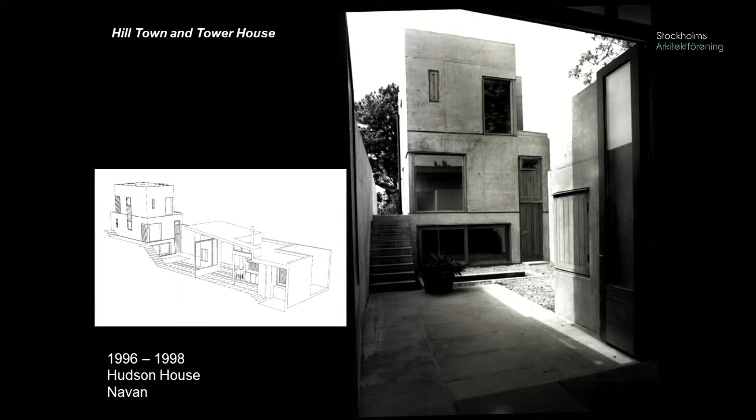The small house we built in Navan is a tower house and a hill town, two buildings arranged across a court. It cuts into the ground and rises above it. The Howth House and the Ranelagh School, designed at the same time, are concerned with building the site, cutting and filling to navigate level changes and to connect the building to its ground.

The school site is small, so new ground is made on the roof, where a light timber and steel structure provides covered outdoor space for learning and play. And at ground level, the veranda and corridor...

Here, the slides aren't moving again. Yep, thanks, that's fine.

At ground level, the veranda and the corridor act as a single space between inside and outside, where the building and the site become one, a contingent space where people can pause before committing to enter.

So the next phase I'll talk about is talking to trees and air. In Cork, at University College Cork, we've built three projects, but the one I want to talk about is their University Art Gallery, located in a remarkable piece of ground here. This is before the building was built. The beautiful river runs through the site, and there are mature trees.

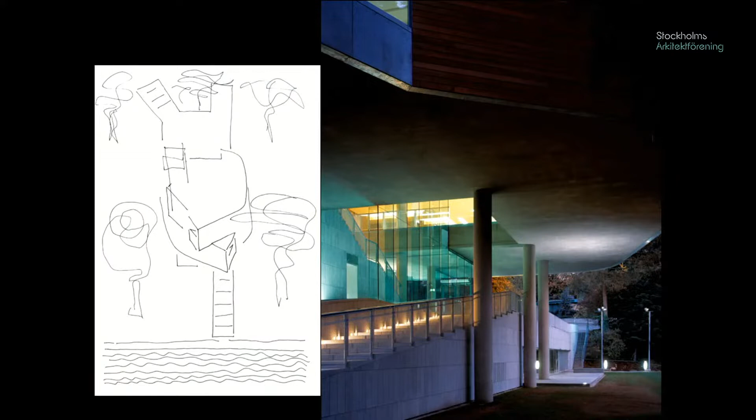So our project raises the gallery and the usable spaces above ground with big cantilevers so that the structure of the building doesn't interfere with the roots of the trees, and allows the trees to continue to exist really close to the building.

Because of the level change on the site, you walk across from the avenue over the cafe and the storage areas down through the site. So in a way, the building is divided into two parts, one in the air and one on the ground.

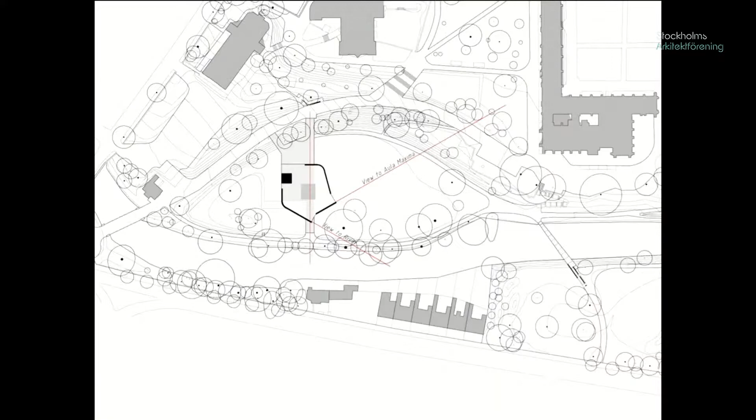Within that, the building kind of twists and turns to take in particular views of the campus. We're very interested in this idea about balance and contrapposto, as you find in sculptures, for example, of Bernini — the idea that the balance of a building might almost be twisted on its base, and that the building is then allowed to face in different directions and have this sense of asymmetrical stability.

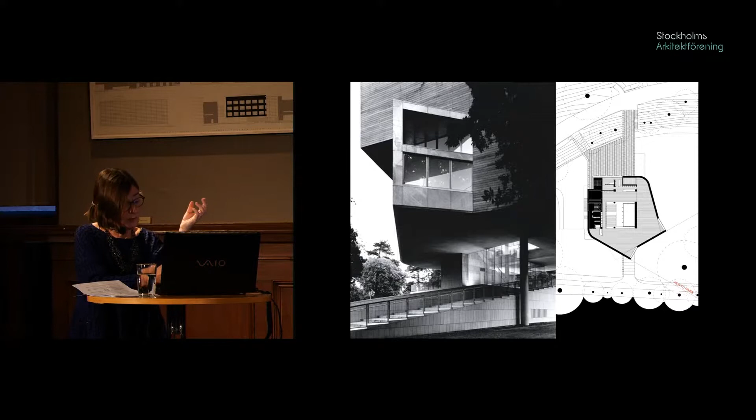In fact, all the exhibition walls are straight walls, but where they turn a corner, the corners are curved. The windows are in a way outside the gallery spaces. You step into a triangular space, and the windows connect you with the trees and the buildings on the campus.

I suppose the other important idea about walking through this section is that you would be walking through this space — the cafe is underneath and the galleries are above.

We've hollowed out a kind of upside-down courtyard so that when you're walking through, as in this photograph, you can see into some of the galleries at first floor, but because you're totally sheltered, there's no daylight, no reflections — you see completely into those galleries.

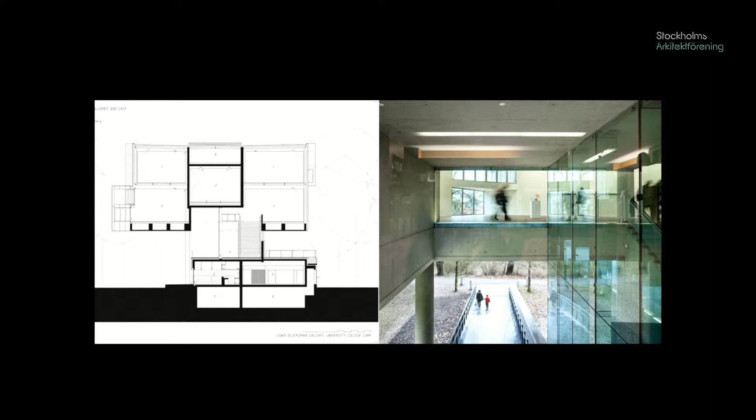This was a way of making it clear to students walking through the campus what was happening in the building — that there are exhibitions, that there are events in this building — so they can choose either to engage or not engage, or they can engage simply by looking in from outside as they walk under the building.

When you're inside, when you step into these window spaces, you're in a space between inside and outside. In a way, you're in the trees and you're in the gallery, but there's a low ceiling in the windows, so you're in a kind of space between.

The view of the building from the ground is that the path runs through as an external route, and then you have the cafe under, and pulled aside and shifted in this contrapposto relationship is the gallery above.

Talking to real and imagined places, we've done a number of installations in Venice at the Biennale, and it's always an interesting and difficult challenge to exhibit architecture, because if you're exhibiting art, painting or sculpture, you exhibit the actual works, but at an architectural exhibition, you're normally exhibiting representations of works.

So this Capriccio by Canaletto of Palladio buildings we found really interesting, where Canaletto collected a series of both built and unbuilt buildings by Palladio and put them together in a kind of new place invented by him, an imaginary place.

And yet it's real, because some of these buildings are really built and because they're fully designed.

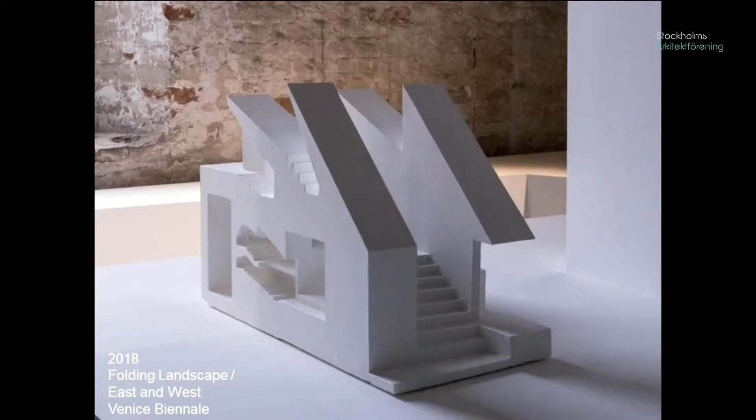Our installation in 2018 in the Free Space, Grafton Biennale, was titled Folding Landscape East and West. We were thinking of it as a little building in its own right, in conversation with the Corderia, but also as a representation of two unbuilt projects we were working on at the time. The first is the Robinson Research Centre in Roundstone on the west coast of Ireland, a really interesting ongoing, or possibly not ongoing, project which I'm trying to make happen.

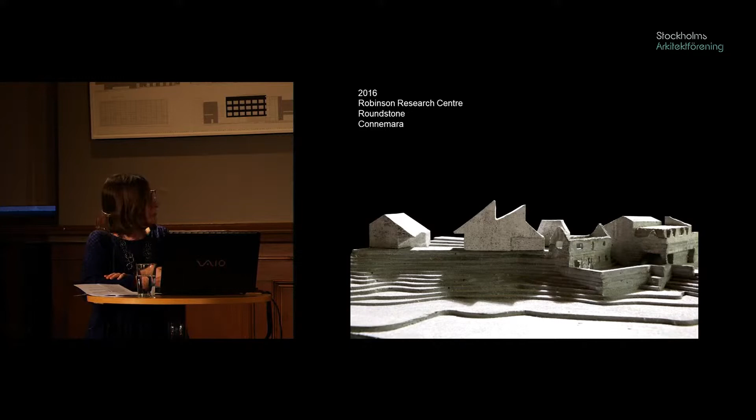There's an existing house on the site, the house of a wonderful man, Tim Robinson, whom I mentioned earlier, who was a cartographer, a writer, an artist, and a mathematician. He lived for more than 30 years in this house at the end of the pier in the village of Roundstone, a very special village in the west of Ireland.

It's always had many painters and artists visiting, so there are lots of artistic representations of it. It's a planned town, laid out by a Scottish engineer in the early 19th century as a single-sided town facing out to the sea, with a straight street of houses. Nimmo, the engineer, also designed the pier — he designed many piers in the west of Ireland.

At the end of that pier is the house of Tim and Mairead Robinson, who both sadly passed away during the COVID lockdown. This is a portrait of Tim in his studio, a wonderful man who came from England to live on the Aran Islands around 1970.

Because there was no map of the Aran Islands, he decided he had to draw one. Then he had to learn the Irish language because he needed to put in Irish place names. He subsequently developed an amazing way of describing and giving back to us our own landscape.

So we all in the west of Ireland understand our place more because of Tim's work. His maps — this is part of one of them, he made three in the end — are very much about place names as well as the shape of places. The place names are a huge part of people's understanding of the history of these places.

Most of the names on the Ordnance Survey maps in the 19th century were translated roughly, and badly, into English. So Tim went back, found what the original Irish names were, and put them all on the maps.

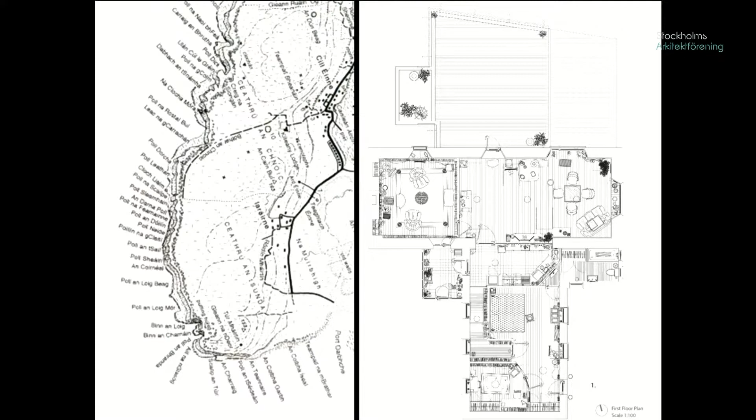When we started looking at his place, we brought students there maybe ten or more years ago. The first task we set them was to make a map, a survey — like a map of Tim and Mairead's house. They drew the house with every piece of furniture, the books on the shelf, the bottle on the table, the bedspread on the bed, as a kind of starting point for mapping the house.

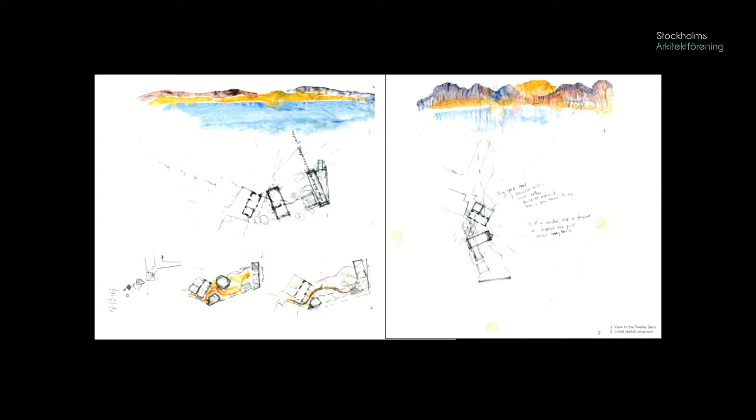These were two wonderful, elderly people living in a kind of genteel poverty in a place that looks out at this wonderful landscape. We were commissioned by the university in Galway, to whom Tim had agreed to bequeath the house, to design a research centre to continue after his death — a research and exhibition place.

I made these drawings on site, just thinking about the relationship between the house and the landscape, the views, and how that might evolve. Then we went on holidays to Greece in the middle of thinking about that.

So I started drawing these amazing stones, the hard obsidian and the tufa rock, thinking about weight and lightness and different types of concrete and construction.

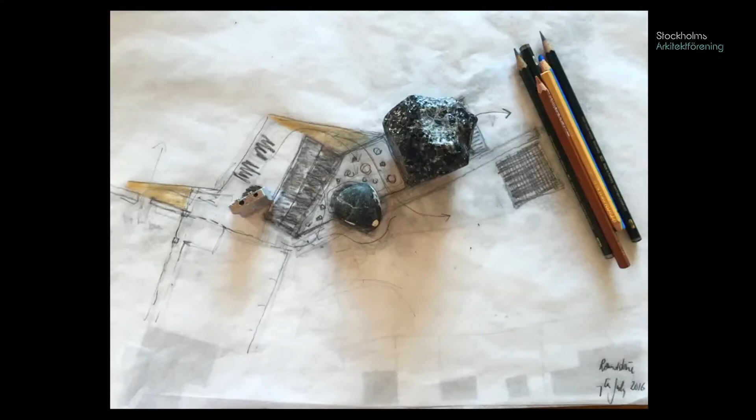Because we were on holiday while thinking about the design, we ended up making a model like a sketch, using one of those stones along with some pencils and a pencil sharpener — the pencil sharpener became the lift shaft, the stone the big room, and the pencils the studios.

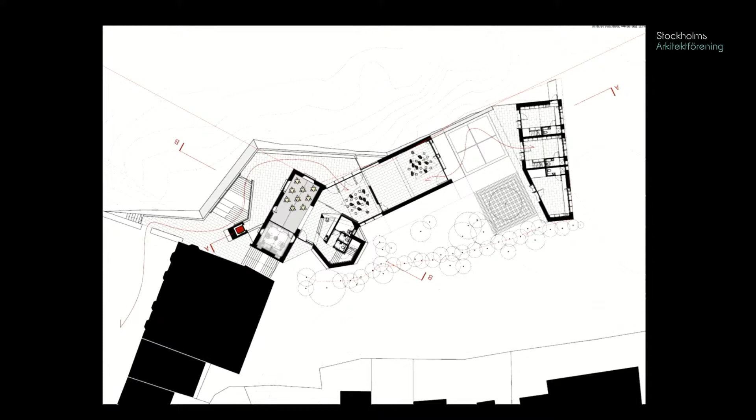Then we came back, and the people in the office drew up this project, which adds to the existing house and makes a wall of research studios along one edge, keeping various elements of the landscape and garden that Tim developed.

There's this sad story that Tim died and then the university turned down the bequest to the house because they didn't want to take on the expense of doing it up and running it. They had already received his archive and absorbed that into the university. So our project was to make these big rooms with big roofs that bring light in for exhibition, for meeting, for projects, made in a kind of concrete mix using local seashells and sand.

When we were invited to Free Space, we made this installation. It's like a little building, really. This is a 1:2 model of that big room we were making in Connemara. So we built the project at 1:2 here, but we also made it like a landscape, a place you could step onto with seats and benches, because we're obsessed with seats and benches.

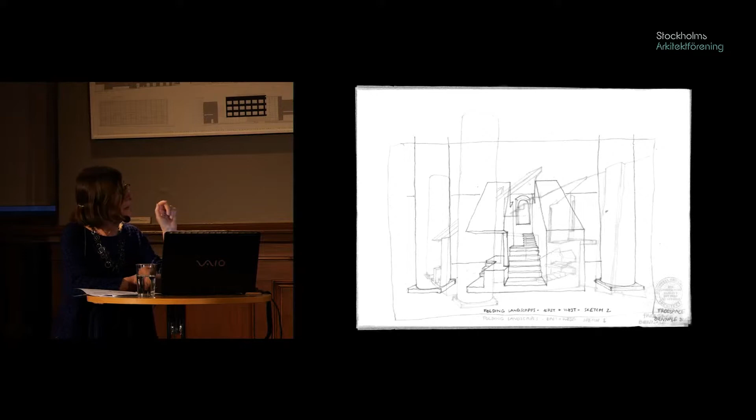This is also about having a conversation with the amazing brick columns in the Corderie, and particularly with the window. So the main intention of this project is to make a stairs that you could walk up so you could look out the window in the Corderie and see the canal below. We selected a bay where there's a canal outside, and the building is an installation to let you look out a window and look at some brick columns, but it's also a representation of a project, and it's also like a Greek chapel in the landscape.

It's a whitewashed structure which has its own kind of presence, and we worked on this also another year in Greece. So while sketching these chapels, I was also sketching ideas for this installation, which is about itself as well as being about these two projects.

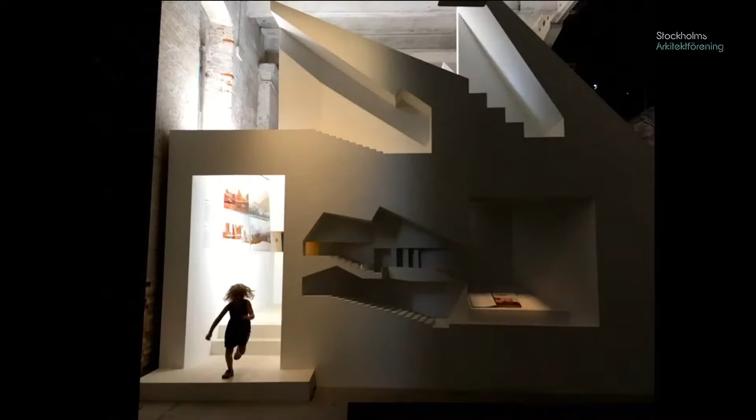The second project is an opera house in Shanghai at 1:10, which we lost the competition, and I'm not going to say any more about it.

But the installation has little spaces underneath. It's like an Irish shrine where you can walk behind and look at drawings, and there's precious places with gold leaf. And then there's a sense all the time of people moving through between the brick columns and up and down this whitewashed structure in this place.

I mentioned in the introduction that sometimes we're talking to, or conversing with, representations of place. And I really am quite obsessed with maps. I suppose, obviously, the Nolli maps of Rome are among the most wonderful maps ever made. So we tend to go every year to Rome in January for 5 days.

I always take a set of photocopies of bits of the Nolli map, the bits I know I'll be in. And every day I draw a line in a different colour pencil of all the routes I take that day. Over 5 days, the map—because it's usually 5 days, and luckily there's only about 5 colours you can tolerate seeing on a map—you build up a kind of intensity around where we stay near the Pantheon, completely woven with lines that move backwards and forwards and cross over each other.

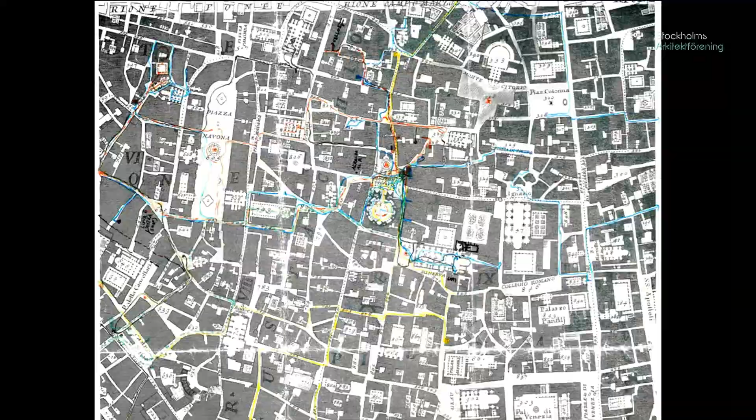And then occasionally you just find little places that you only visit once, which are special. What I find is this really interesting dialogue between observing and understanding, looking at the map and looking at reality. Sometimes I come home in the evening, draw all the lines, and then I see somewhere on the map and think, how come I've never been in that corner? So the next day I go back to it.

Or I'm walking through the city and I suddenly see, in this case, a set of really interesting angles, and I look on the map and find that they're there. But the angles on the map are so subtle you'd hardly read them, whereas in reality they're actually quite strong. So I found this a really interesting way of understanding place, to see how it's drawn and then to walk through the drawing at the same time. In a sense, you come to own the place by inhabiting the map.

At the last minute, just before you come through to the Frari, you walk through a gap that is about 900 millimeters wide, less than a meter. This is a major pedestrian route to the city, and you see the light beyond of the Frari, the light of a public space.

It's such an interesting thing to realize that in cities, this compression and release is so important. If you were designing that now, the traffic engineer would say it's got to be 5 meters wide, and you'd say no, it doesn't—it can be 0.9 meters wide.

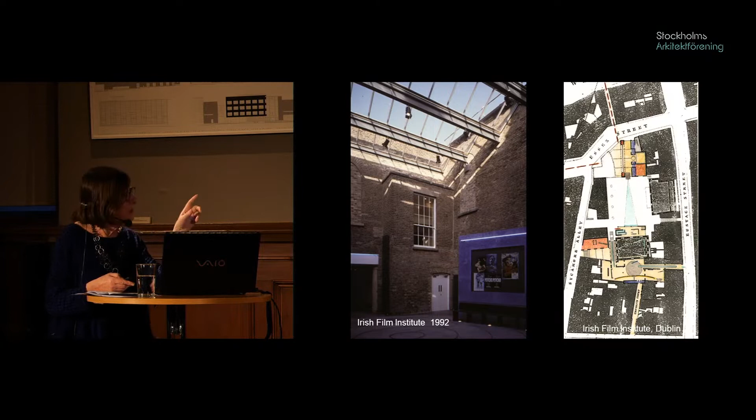This is an early project we did for the Irish Film Institute, a set of existing buildings. We have a beautiful map of Dublin from the 19th century which we kind of scratched and carved our project into. It's a project weaving between old and new, using an existing corridor that comes through into a tall space. The sense of the spaces we're trying to make here is something we have learned, and continue to learn, particularly from the spaces in the city of Venice.

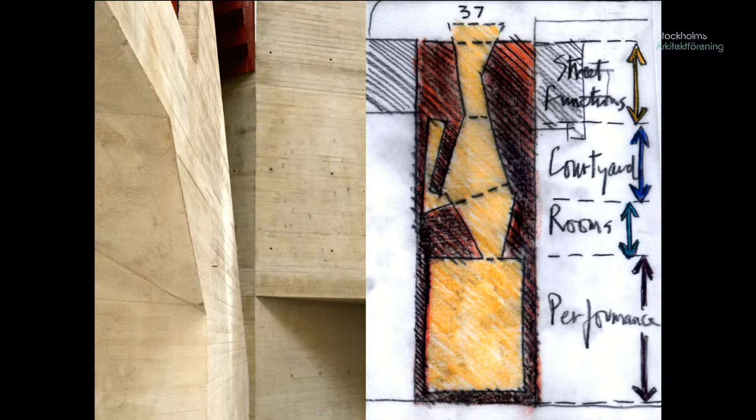Another project, in the north of Ireland in Derry, is an Irish language cultural centre, on a bizarre site with just one short frontage to the street and three blank sides. So all the daylight and all of the entrance had to be on this short side.

So we carved a route into the middle of the site, and then made a tall space that reaches up and brings light in from the sky. It's like a sort of inversion of a tower house, but it's also, in a way, working with that kind of spatial intensity we get in those cities.

Talking to the city, talking to Dublin—up to 10 or 12 years ago we finished a social housing project in the Liberties area of Dublin, a really traditional historic residential area, but on the edge of a kind of 19th century industrial Georgian area too. So it's a really interesting place.

It got eroded in different ways over many years, but finally Dublin City Council put this huge new road through, which they call a street, but it's not a street, it's a road. They knocked down half of the Georgian buildings and exposed a sort of frontage, which then we were asked to design this project in.

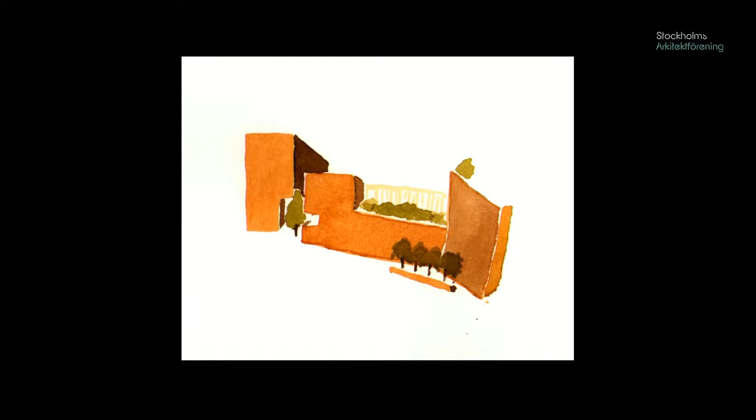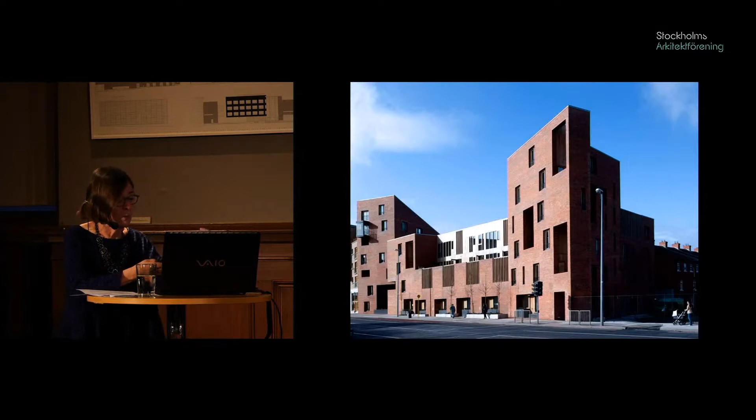Our idea was to build a new front, almost like putting a sticking plaster on a wound, to build a new front to the street which varies in height to allow sunshine to come through, and which has an urban quality.

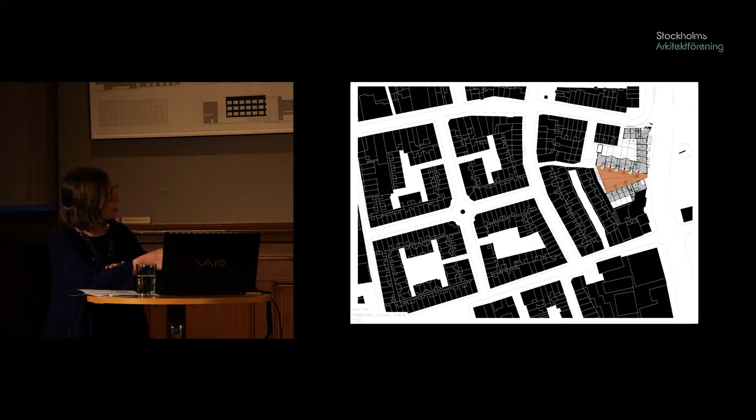In plan, we wanted to make a public space, but because of the new street going by there would be a lot of traffic. So we spent a long time looking at the site, and realized that if we made one building parallel to that street and the other parallel to this street, we'd actually come up with a triangular space—narrow on the noisy side, then opening out to the side where all the other residential streets of the area are.

So on the noisy side, looking to the street, you have this very narrow compression, and it captures this beautiful early 19th century industrial building at the back of a Georgian house. Then in the other direction, the buildings slope down in height to relate to the scale of the streets of houses which move off towards the north of the city.

We wanted to make a really Dublin building, one which relates to the character, material and mass of Dublin. We're really interested in these Georgian houses, and our observation that because of the way the Georgians built so practically, there's a door, and then on the ground floor a room with the window in the middle. Upstairs, the room is the full width, and its windows are symmetrically located, which means they don't line up over the one below.

So in this project, which is lots of tiny apartments and rooms according to the minimum space standards, we use this idea of stretching the brick wall and pulling the windows apart in a way where they needed to be in relation to kitchens, living rooms, and bedrooms, and then making this quiet space, sheltered by being narrow at one end, with little moments with tree planting, steps and seats where outside each house there's a recess on the ground floor and places that children can play. At the same time, at the top of the building there are these little winter gardens which project out and give the residents views back over the city.

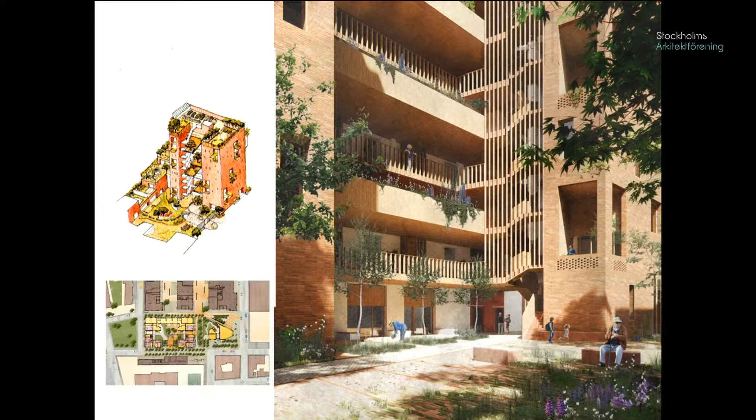At the moment we're working on 3 new social housing projects, which, after 12 years, we finally were allowed to do again by Dublin City Council, and they're working at a somewhat different, bigger scale. Our idea is we're trying to make courtyards with deck access, with double height decks wider on 2 levels, with a lot of planting and a sense of connection with the garden and an external stair, so that it's like a sort of winter garden with these stepping double height terraces and balconies opening into a garden, and then the residences space out around the city.

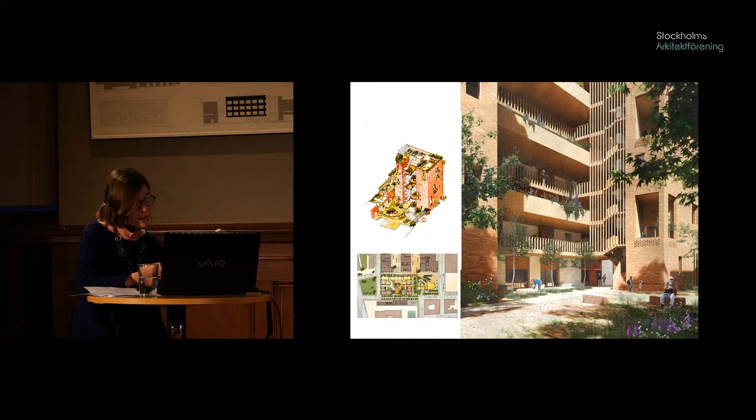They're in the Guinness area of Dublin, which has existing buildings of incredible, beautiful industrial scale from the 19th century, 10 and 11-story buildings. On another small site, a little corner I used to look at on my walks, there's a vista down a long street to this little corner site, and we're making a building which turns to face down that street, and then it just wraps around a little garden. Again, we're working with ideas about decks and community.

So now I'm talking to another city, which is London.

In 2009, we won a competition to design a new student centre for the London School of Economics, a kind of amazing site at a moment in the city where Kingsway, built in about 1900, drives its way through a previous medieval network of streets. So you get a combination of straight edges and knotted streets, and it's a really complicated site, triangular in shape. The project was to make a student centre with very many different functions, all of which wanted to feel that they were public and almost on the ground floor.

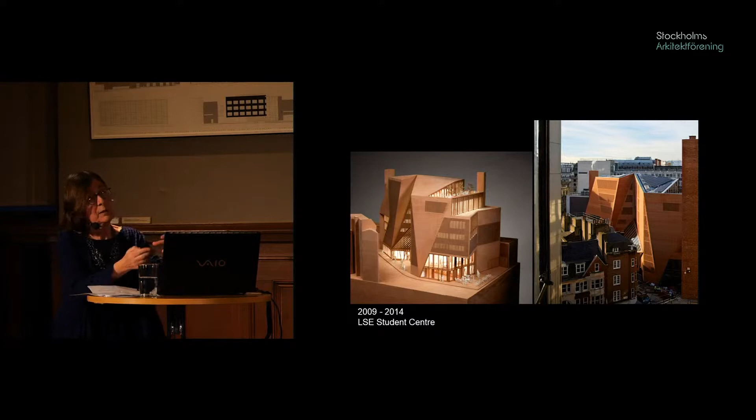They wanted to feel in some way connected, but it had to be 2 stories below ground and 6 or 7 stories above. What we decided was we wanted to make a building that had a kind of singular integrity as an object, as a thing, like a sort of brick mountain. Because the first day we went to the site, we just felt so strongly that it should be a brick building in the context that it's in.

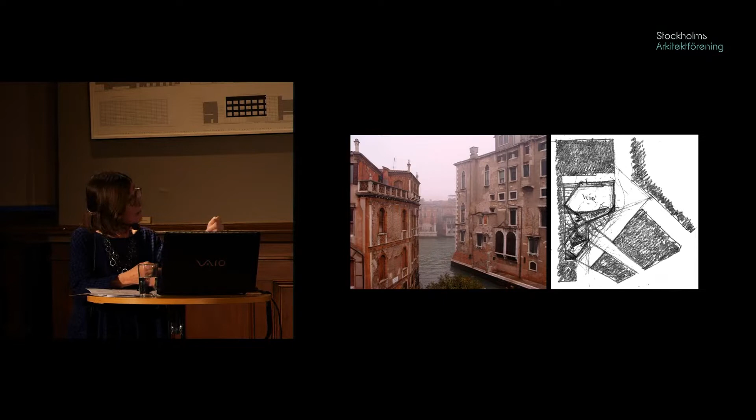So the site is this triangle, right, just corner ways off Lincoln's Inn Fields. There are all these streets that come up to it, all part of the LSE campus, because the campus is a piece of city rather than an enclosed ground. The sketch on the right is the sort of early plan sketch we were doing. And in our minds, yet again, of course, was Venice.

This amazing place in Venice, a little pensione we stay in sometimes, where you look out and see these 2 buildings which frame a view to the Grand Canal. It almost feels like those 2 buildings are moving in relation to each other because of the kind of geometry, and maybe because there's water between them.

We were thinking about how the students will be coming up these different streets, and we're making a kind of triangular cut here, and the big room, which is the nightclub in the basement, in this corner.

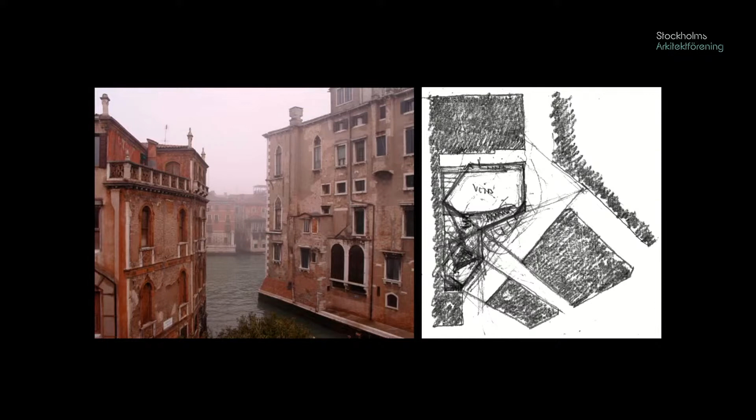Another aspect is the sense you get in Rome when you're walking up little streets and you see this incredible big building, but you only experience it as a fragment until you come into the space. That's very much how we realized the student centre would be experienced, because students coming up just see a little bit of it. In fact, we designed it in perspective, using perspective drawings of how you'd catch glimpses of this building as our way of developing the design. We're making a kind of cut in at the ground floor to give you a covered outdoor space, and then you move up through the building.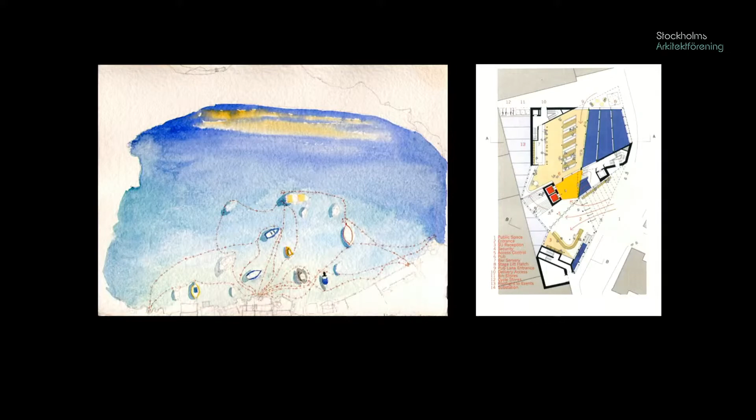The drawing on the right is the competition plan. We had this idea of using the site geometry to establish a right angle in this corner, which remained and is where all the kitchens and toilets occur. Then, in a sense, we tried to carve out and move between things, particularly the lift shaft as a kind of totem that you could move around as you moved up through.

I had been on holidays in Greece making these maps, called swimming maps. We were staying in a house, and every day I'd take a swim out between the boats. When I come back, you can see I really am obsessed with maps. I would map the route I took between the boats, and then a bit like the Nolli map, the next day I'd think, oh, I've never been over that bit, and draw another piece. There's something really interesting about the spatial condition of being in water between objects like boats, which are not still, they're slightly moving. In a way, the space you're in, which is the water, is both space and object.

I think when we were trying to think about how you'd move through this building, there's a kind of positive, negative aspect of space. We thought of the lifts in the building as being a bit like the way you move between the boats, that in a way they redirect you and suggest how you move.

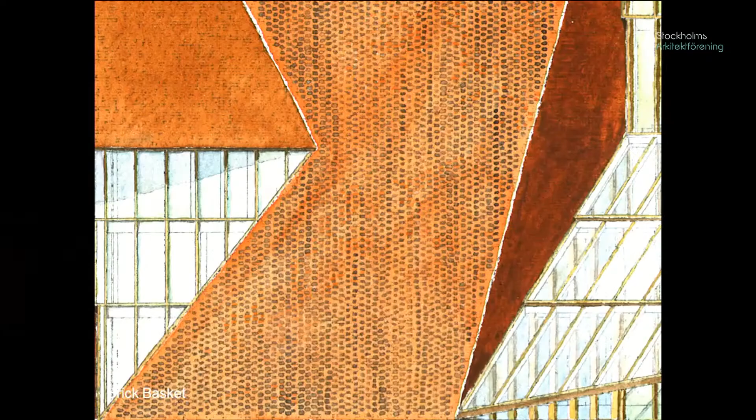Then the brick. These were the competition drawings zoomed in. Because the building had lots of different kinds of spaces, some very public, some very private, like a prayer center, a gym, and a dance studio which need to be somewhat sheltered, and other spaces that want to be very open, we came up with the idea of using brick as a combination — some places solid, in other places perforated, so light comes through the stretched bricks. This is how the building is in its finished form. Some rooms are covered with a screen of brick, and other rooms are solid. We also decided we would cut no bricks, and the reason for the form relates to regulations about rights of light — the building had to step back as it went up to avoid shadowing others.

Because they're handmade bricks — this is part of our exhibition in Venice in 2012. These are some of the molds the bricks are made in, wooden molds, and you can make a brick any shape because you just have to make a wooden mold. The drawing on the left is by an amazing woman, Laura, in our office, who drew maybe 100 different kinds of special brick in this building, all three-dimensionally and in plan.

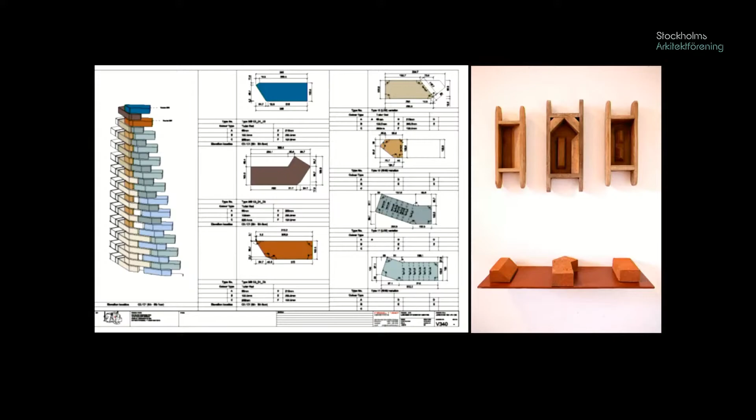That gives us this sense of a continuous mass, that there isn't a joint at the corner, because every corner is made by a brick that is shaped. The geometry of the building comes out of this underlying grid we developed from the site geometries and the connections across different parts, which gives us the plan with the stair and the lift.

The stair effectively is like a public lane — we had the idea the stair is like one of the lanes on the site, and you come up and wind around the lifts, then you come to the front door of the gym or the cafe or other spaces. Outside, where we carved back, we built this timber and steel canopy to give a kind of loitering, contingent space before you go into the building. In the competition, we were thinking about the stairs as this dynamic space that you move through and around.

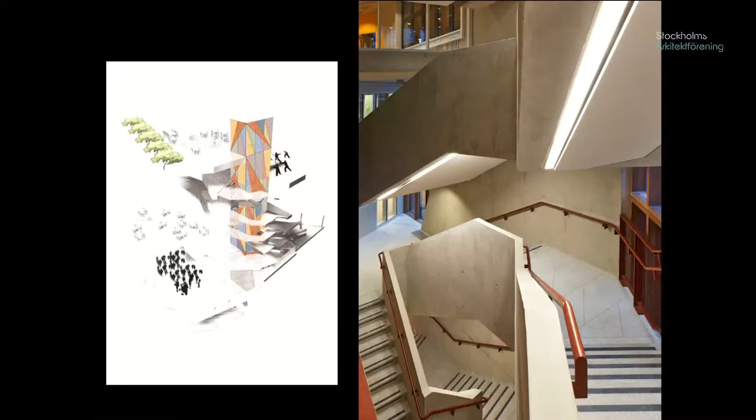The building pulls away where the stairs are from the back walls, so small courtyards bring in daylight. Sometimes the stairs wind back on themselves and you see into the radio station or the gym or different activities on each level. So the movement of the stairs becomes a kind of dynamic of the building.

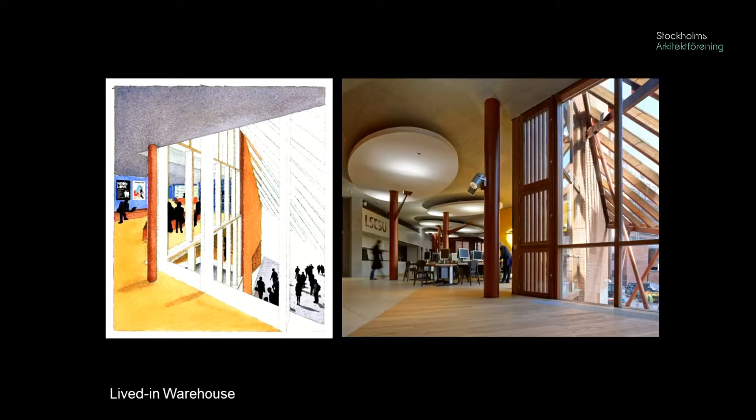On the first floor there's a big cafe which is completely open, facing out towards Lincoln's Inn Fields. In the competition we were imagining that from there you're looking under the canopy to the outdoor space, and the photograph shows how it was built.

One thing we were very pleased with is that at the end of the project, we were asked to do the external landscaping by Westminster City Council. So the materials, spaces, and light fittings of the building continue out into that space, which in a way means the building extends beyond its own boundary.

In Budapest, we're not just talking to the city, but also to old buildings. We did a project finished in 2016 for the Central European University, an amazing campus in the middle of downtown Budapest, with a set of beautiful existing buildings, adjacent but not interconnected. The project we built, phase one of the overall campus, consists of one completely new building and one refurbished and transformed building.

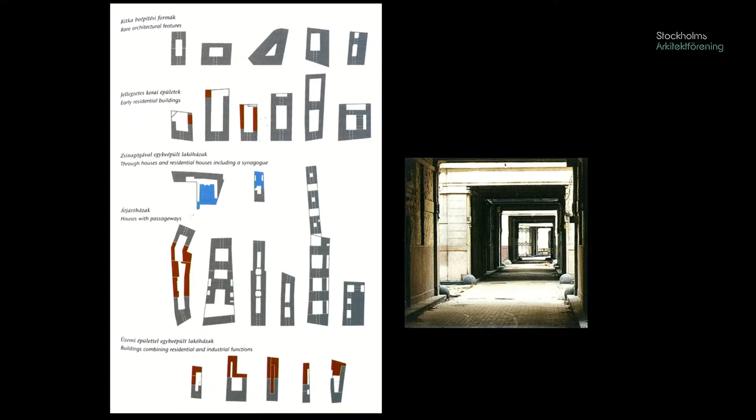Budapest is an amazing city of courtyards. We spent a long time walking around and studying these interconnected yards. The most famous is probably the House of Seven Courtyards, a string of seven courts interconnected. So we felt from the start that our project would be about courtyards and about connections.

This was the survey plan of what the place was like, with these really thick walls, because you're legally prevented from connecting through to adjoining properties. But we said, maybe the most important drawing in our competition was that we should open up connections, and the whole place should become a kind of interconnected warren of courts and rooms.

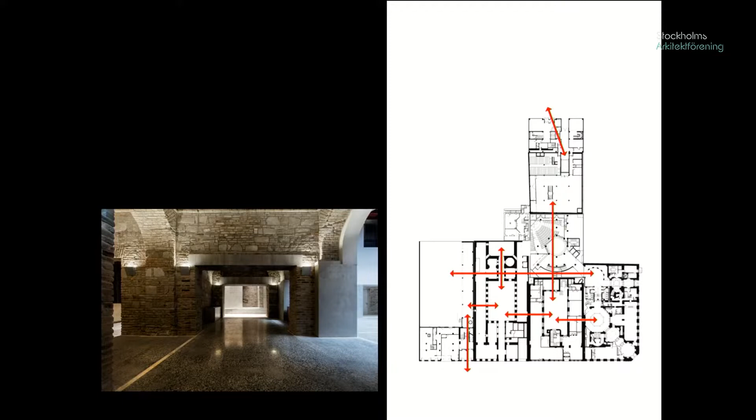On the left is a photograph after it's finished, of the old building. What we did was knock down the early 20th century building, which wasn't filling its site, and build a new building here, then refurbish and transform this one. That photo is in the old building, carving a new space through the old.

These images are among many we often think about regarding how you make connections between things which are separate. One is this amazing Portico di Ottavia in Rome, where there's a kind of layer, a palimpsest, there's the ancient, there's Baroque, there's medieval, there's Renaissance, and then there's this man running his little taverna behind a plastic curtain, all layered on top of each other, making the character of the city as it is now.

And then the Gordon Matta-Clark amazing conical intersect that he made in Paris on the buildings that were being demolished to build the Pompidou Center. He did this incredible project, which by cutting holes through a number of adjoining buildings gives an incredible new perception of buildings which are separated by party walls.

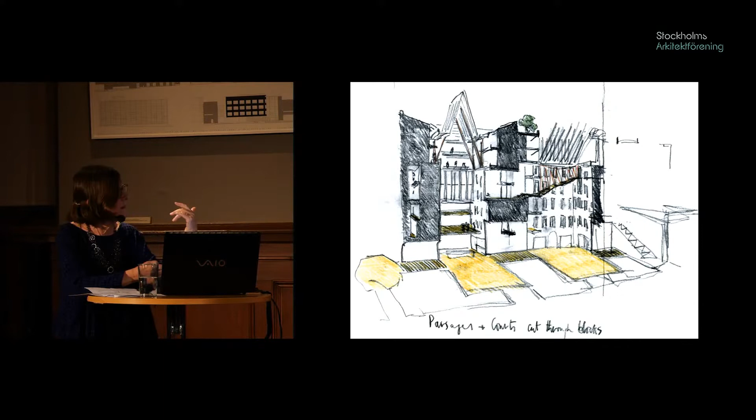So our idea here is that we would take these existing buildings and make it into a single university. That's the old building there, with a new roof on its courtyard. We would just make these cuts through and stairs that connect into the new building, so we'd be connecting the university by these built elements.

And then we roofed the courtyards because climate is very extreme in Budapest, and the design of this sharp angled courtyard is completely driven by the direction of the sun, ventilation, and avoiding heat buildup. They wanted the courtyards covered for indoor events, but the professors wanted their offices not to open into that acoustic space.

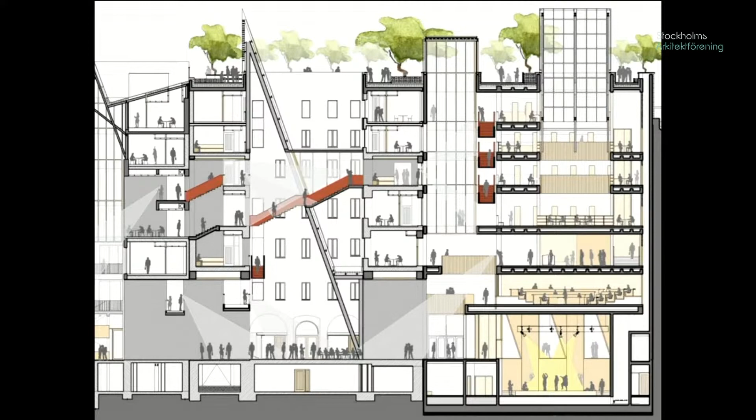So this fresh air comes down to here, and this bridge goes through from the inside to the outside and then connects into the new building here. That's that bridge as it moves up through outside and inside.

And eventually there's a roof garden, which has a fantastic view of the Hungarian parliament, which turns out to be the enemy of the project. But because there's no open ground, there's a wonderful roof garden with productive gardens, and they grow vegetables for the cafe. And then at the ground, the building is stone.

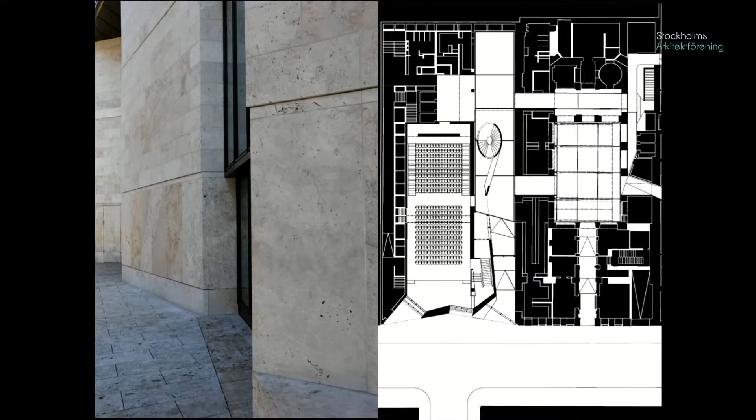This is the new building with its seat and its recesses. In the plan, the new building is here and the transformed building is here. The new building has its entrance to one side because we needed to put in a big auditorium, and all the old buildings enter the courtyards from the middle. This also means that this entrance route can connect into the next door building.

Our new building comprises a series of courtyards which are roofed and are quite small, and some go right up through the building. In that building there is the auditorium I've mentioned, a full new university library, conference rooms and meeting rooms. The public part is this concrete stair that winds its way through behind the auditorium into this courtyard, which is part of the library.

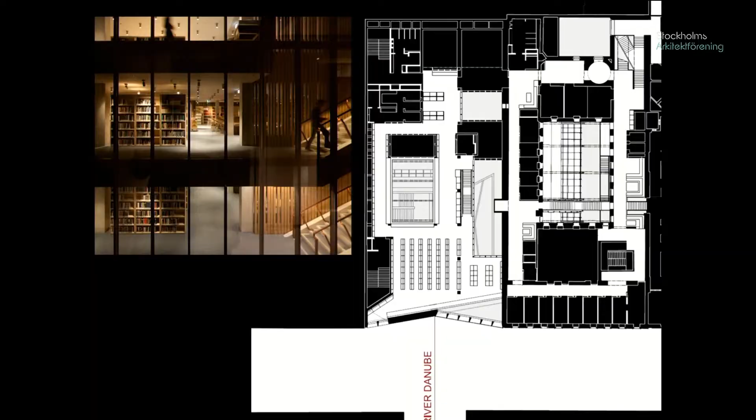And the red box that you see here is from the building next door, the old building. So in the plan of the existing building, as you come down the corridor or the stairs, you can just step through the wall and be within the library of the new building. The library has this big rooflit space and many layers of reading, little spaces looking over the Danube, and different senses of different kinds of places to study and read.

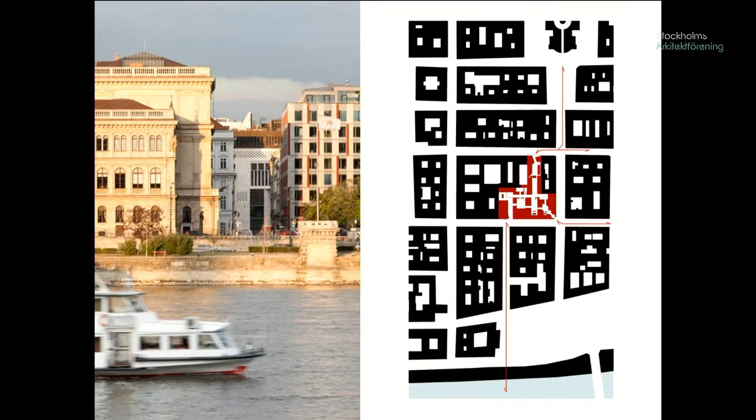And the facade, we've made a new facade, which you can see from the view down the Danube, made in a local stone. It's a local limestone called Suto, which we found wonderful. We went to the quarry and found wonderful stone markers, so all these window mullions are made in solid stone. The quarry north of Budapest has been in use since Roman times, so a lot of this stone went to Italy also. Some travertine in Italy comes from the quarries in this part of Hungary.

And we found the stone we were going to use in the building, and they said, okay, we're going to set aside this piece of stone. What really struck us when we went there was that the quarry, in a way, felt like the facade of our building. We were really surprised to see it has these beautiful holes in the stone.

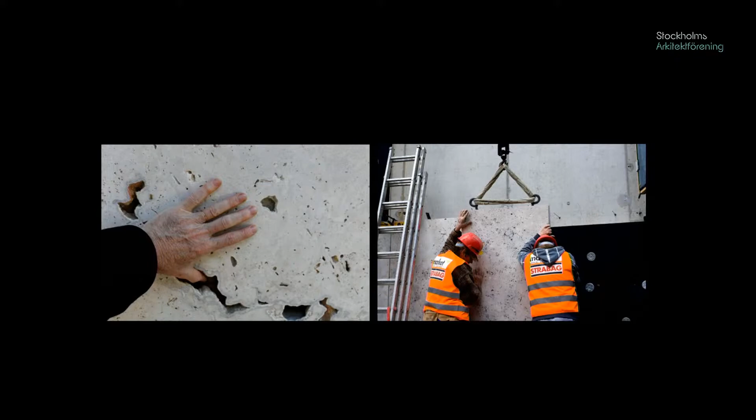So we used the stone quite thick, about 80 millimeters, and that was important, giving it this weight. Then you get the mullions and solid parts which are in a conversation with the building across the road, which is made in exactly the same stone hundreds of years ago. The facade pulls back and makes, again, these kind of spaces outside, which give you a place of entrance, a place of encounter with the building before you go in.

The bit on the left was phase 2, which actually didn't happen on the further street. The reason it didn't happen was because the Hungarian government effectively closed down, expelled CEU from Budapest, and they've had to move. They're now moving to Vienna.

Nobody knows what's going to happen to the buildings, but they've been targeted because they're considered too liberal, and George Soros is connected. Viktor Orban hates George Soros, so he effectively pushed them out.

The next project involves old buildings and old friends: the Liverpool University School of Architecture, which we won in competition in 2018. This was a really important competition for us because John and I both worked for Jim Stirling, a very important person in our lives whose sense of how to make buildings and relate them to use and site hugely influenced us. He remained closely associated with Liverpool and its School of Architecture, as did others like Bob Maxwell and Colin Rowe, who were all students there at the same time.

The School of Architecture they studied in was Georgian houses on the street and a 1930s building, which is a very nice building. That's a photograph of Stirling sitting apart from all the other students in his graduation year, so he obviously already thought he was somebody.

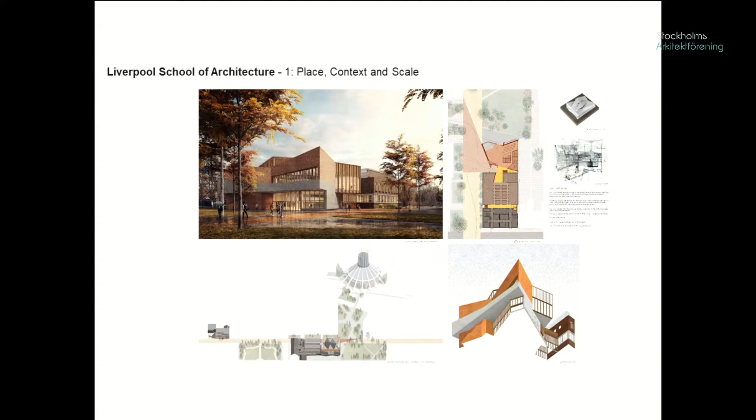Looking that way, Liverpool Cathedral, an amazing kind of big wigwam built around 1960, is visible from here. A very important relationship is from our building towards the view of the cathedral, and it affects the shape of the building.

The drawings and models we made were really thinking about Stirling, so we made these worm's-eye views and worked in a kind of homage to him in the way we drew it. From the ground up, we wanted to think about how the building comes out of the ground at the actual site, but also its relationship with the other buildings, the groundwork, and how it translates itself at roof level, working through sketches, overlays, and models.

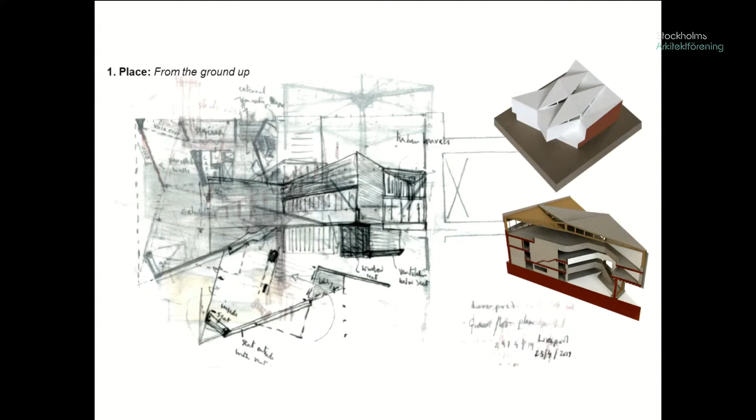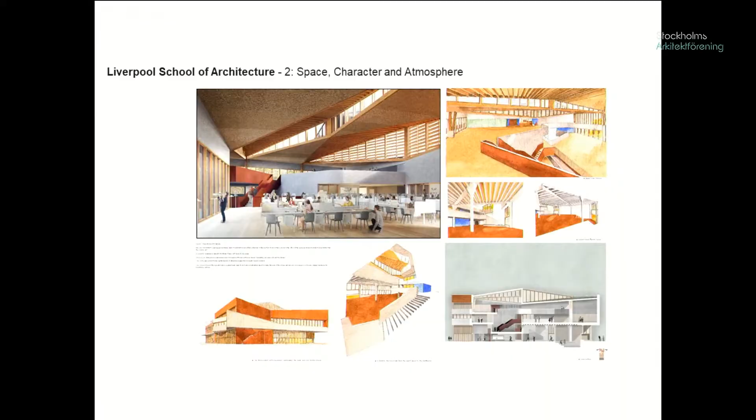The second theme we were thinking about was space, character and atmosphere — what is the School of Architecture? This is a studio-based school. So our project makes this new building like a series of overlapping and interconnected studios, with a concrete structure at the base to stabilize them, and a timber structure above with huge roof lights and 30-meter spans in wood. It's like a table holding up a piece of timber furniture.

We designed it very much by making a 3D model in the computer, and then I work over those and make sketches, thinking about how to connect and make these spaces as a continuous interior experience. This is the main studio, and the red stairs go up to another part of it. These spaces between the old and new building are what we call the 'splice space,' which connects old and new — including the entrance hall, a place for crits, exhibitions, forums and discussions.

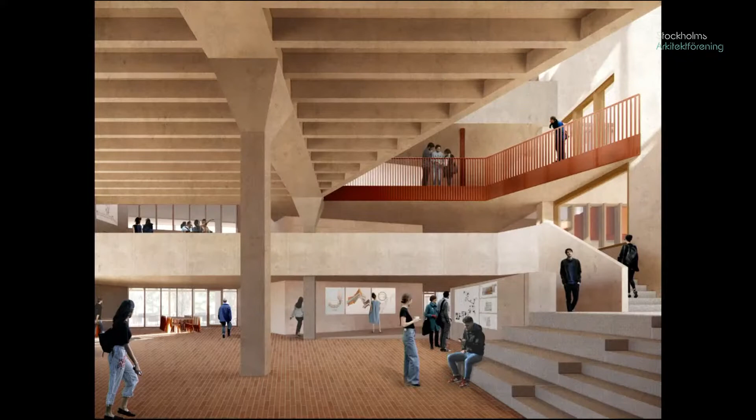I think we're really interested in plans, so everything begins with the plan. A lot of the work in this competition was about how to make sense of how this building connected to that building, and then eventually to our new building — taking out old stairs, putting in new ones, and freeing up connections so you could move from the Georgian building through this building and eventually into the new one.

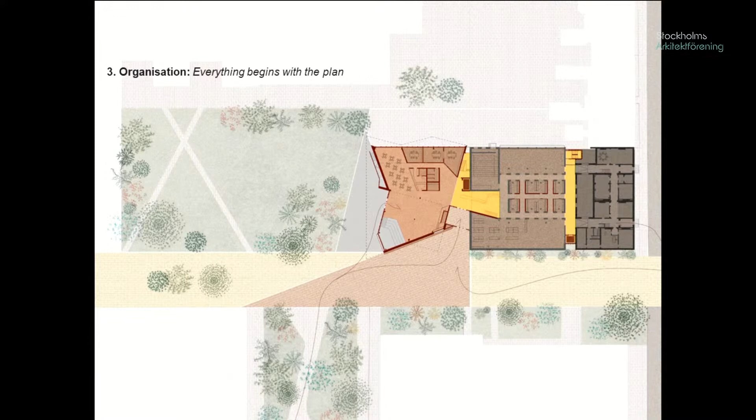The plan is angled this way because of the view to the cathedral down this side cut, and the new main entrance to the school is here. The levels are slightly different between the Georgian, the 1930s, and the new building, so we used ramps to smooth it out so someone could move through all three buildings without encountering staircases, and we moved the lifts to make that happen.

We wanted to make a meaningful whole, so the whole building has a connected language. It's all in brick, all three phases of the building. We made the windows much bigger here and projected them as bay windows so you could see out of the studios as well as getting light in.

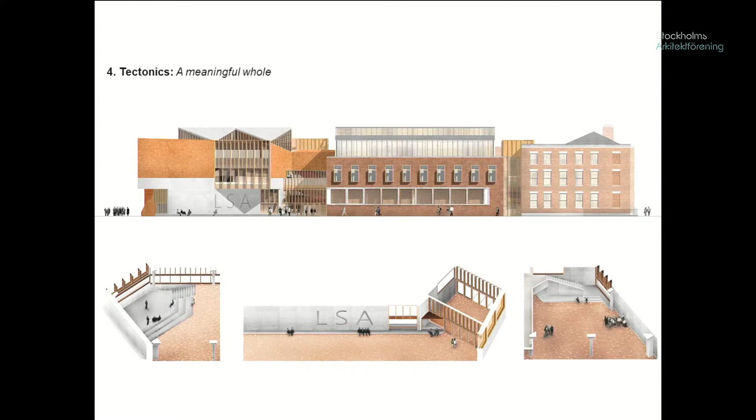We were thinking about the ground and the places that are made in - these are the original competition drawings, the entrance, how it's carved out, that's the Beatles. There are a lot of Liverpool references when you see these drawings up close.

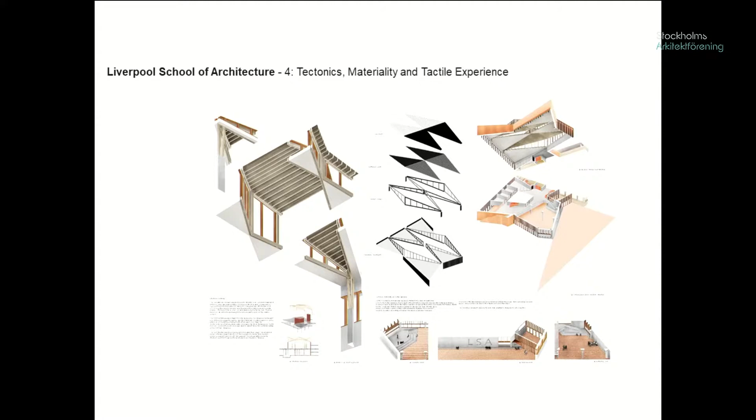We were looking at how to make this roof, the tectonics, and this is where we really were making the drawings - the sort of Stirling-esque worm's eye view drawings of how you would experience the roof structure and the structure at different levels within the building, because it seemed important that the School of Architecture would have an expressed structure.

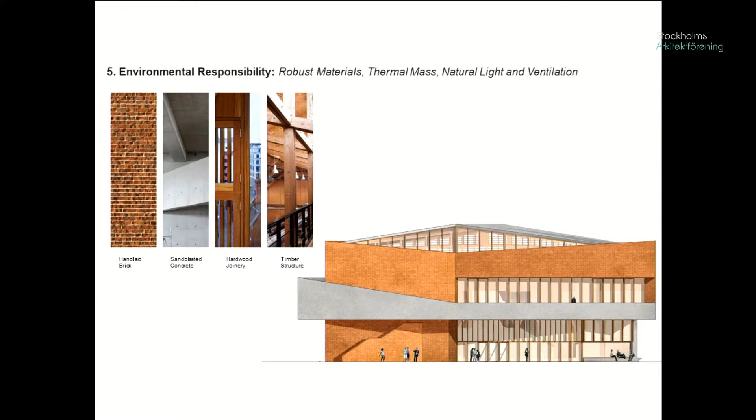We are very interested in environmental responsibility and robust materials that last long, that weather, thermal mass, natural light, ventilation, and of course how the building sits in relation to this cathedral building - which is where this angle comes from. This is the garden outside, maybe more typically on a nice Liverpool rainy day, and we hope that the three buildings will connect with each other.

Conversations with Cultural Place - this is the last project I'm going to talk about, our work in London, in East Bank, in Stratford waterfront, on the site of the Olympics. It was the subject of a competition in 2015 for a new cultural quarter known as Olympicopolis. Boris Johnson was the mayor of London at the time, and Olympicopolis, which was a mouthful for most people, came from his idea of making it like Albertopolis.

That's the Kensington collection of museums, including the V&A, the Natural History Museum, and up to the Albert Memorial in the park. So he wanted to make something similar for the East End, which is really interesting actually, and a really good intention - to make this cultural quarter in the East End of London on the site of the Olympics.

It was an invited competition, and Kieran Long knows a lot about it because he was involved in the V&A at the time and was our client for some time. The project has been through a number of iterations, and this version is from 2017 - the second version, after the competition in 2015.

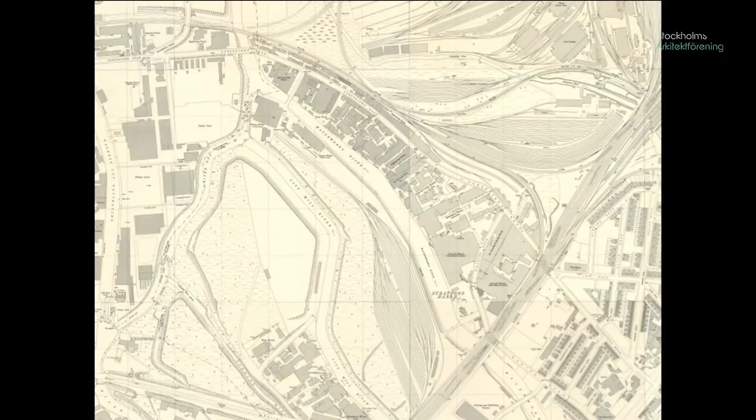It was an industrial part of London with these amazing rivers and railways. In a way, the character it has now, of being bits of land divided by trains and roads and rivers and canals, was actually always there, even back in the 19th century. One thing we really noted in the map was that all the buildings - our site is here - extended from the road to the river. That's what we decided we would do: make every building have two fronts, on the road and the river.

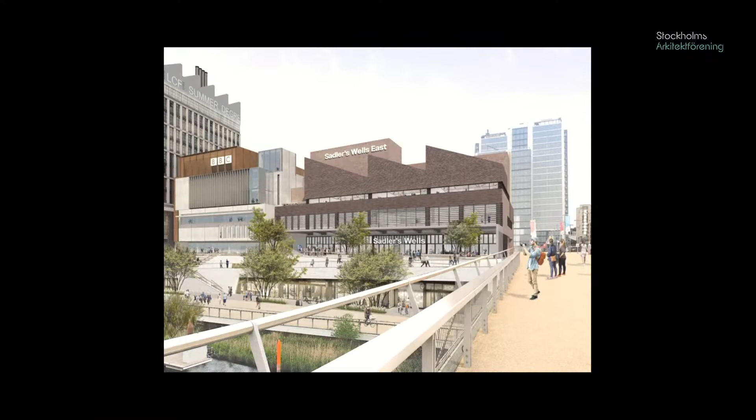This is imagining the future, seeing in the distance past the Aquatic Center, this collection of new buildings. The one at the south end is Sadler's Wells, a dance theatre and dance studios, one of the two projects we're designing.

It's on a very square site, and it's a really interesting brief: 6 dance studios and a big flexible dance theatre. Every one of those rooms is predetermined as rectangular and of certain dimensions, so there wasn't flexibility to make the dance studio a particular shape. The dance studio has got to have right angle corners because choreographers won't accept otherwise—that isn't the case in the Laban Dance Centre, but choreographers will not accept it.

We actually kind of enjoyed the idea that this building is made up of a whole lot of boxy rooms which are similar in size. The clients, Sadler's Wells, were fantastic—they really wanted it to feel ready for work, open and welcoming to people, almost not quite industrial, but a working building. Work is made here, it's not just performed.

So we came up with the language of the sawtooth roof. There are 3 studios at the upper level with strip windows, but they also have north light. The bigger studios at this level have big windows looking out behind screens to the south with a shared balcony. The public spaces are all around what looks like the ground, but isn't, because the levels change on the site.

The Aquatic Center is here. The public level that you enter is way up here, and 8 meters below there's a road where the stage and backstage areas are. So the public come in at the top of a very steep rake into this auditorium, which has retractable seating, and then the studios wrap around that.

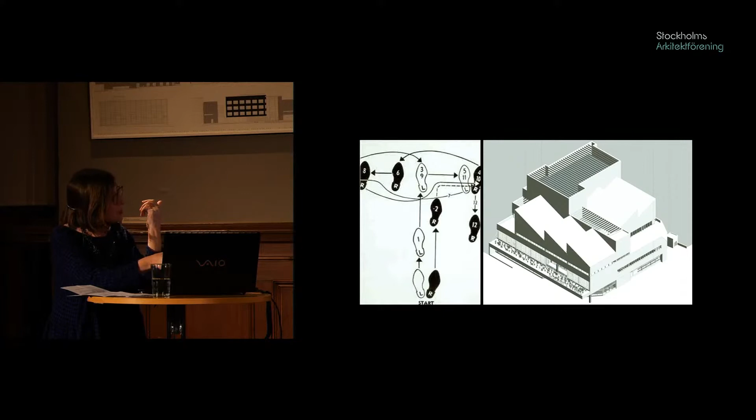We were trying to think about this idea of language—what is dance? How do you express this idea of a set of separate rooms? We looked at these beautiful diagrams choreographers make of how dance steps work, with the black and white feet. That made us think about the sawtooth roof, that the studios would each be expressed on one side, and when it turns the corner, the circulation comes through, and they're expressed again on that side. It's a kind of rhythm in the form of the building, relating to the discipline and yet the movement involved in dance.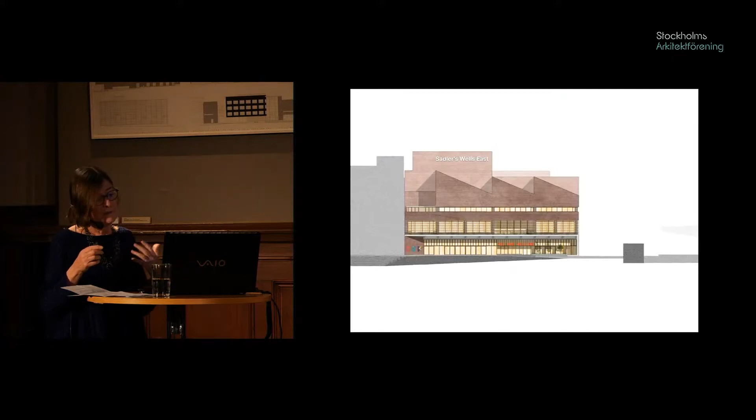This building is very much a brick and clay building, made of purple bricks we're importing from Italy. It gets more and more open as you come down to the public level. At the public level there's an L-shaped foyer, completely glazed. At the level above is the studios with big windows, 3 studios here and a double height, and then the upper studios—and in the background, the fly tower of the main auditorium.

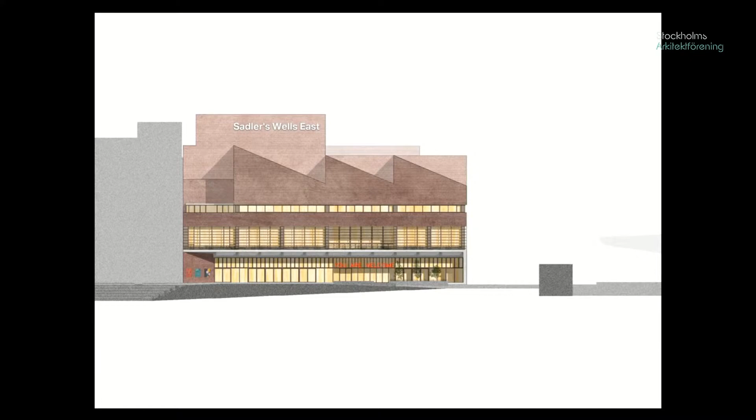The section is really simple, but the structure is tricky—heavyweight, because people dancing cause incredible vibration. We had to use a concrete structure and enormous beams, which we found hard to accept, but they had to be this big because of the vibrations that dance sets up.

The foyer runs under the studios, and at one point a studio is left out, becoming double height, so you can look over from the studio entrances to that. Then you simply have the lines of the structure coming down, with 3 studios on top of 2.

In section the other direction, the auditorium has this huge fly tower, because dance needs a very big stage and a lot of props and sets to be moved around. But the audience only experience the building from this level, and they come in and are able to see right down from the bar through to the stage.

On plan, because of the way the building is on a corner, it's got these 2 public faces, and it's actually semi-detached to the London College of Fashion next door. The auditorium is in the dark corner, and the public space is wrapped around in one space, but with a lot of recesses and nooks and crannies to allow for different kinds of activities, and to allow it to feel, if there's only a few people there, that it isn't one big empty space.

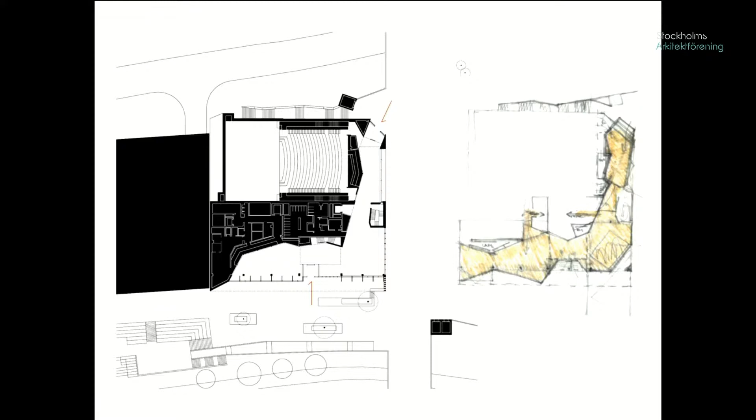So we worked a lot on how to articulate those public spaces that move through the building. In section, there's a big canopy on the south side to give you a sheltered area outside the cafe and bar. In some places it's single height, then it steps up to double height in the place I mentioned where the studios look down.

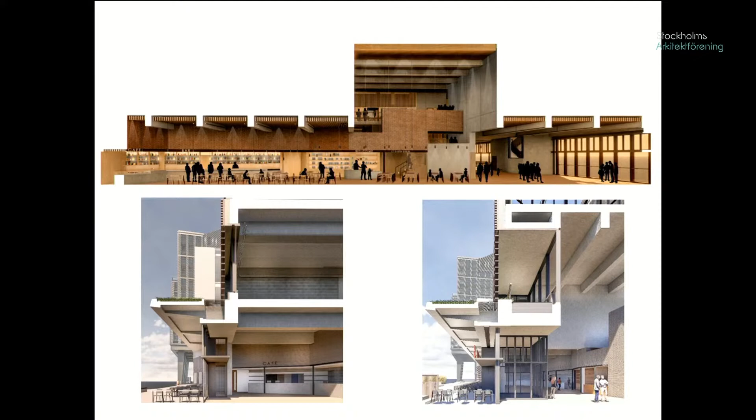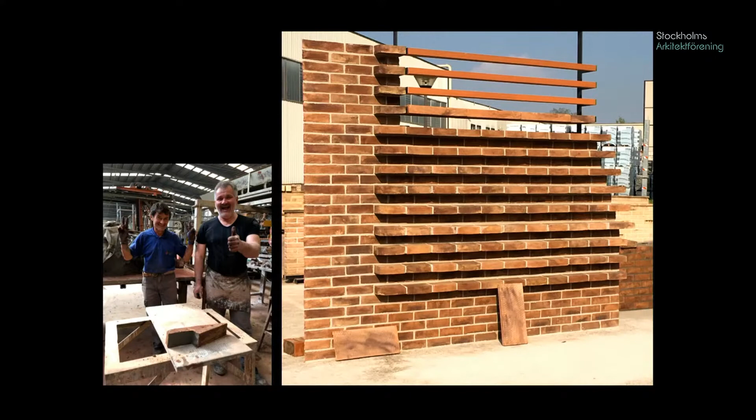We were looking at the Aurelian walls in Rome, and how, if you're thinking about designing a theatre, the Aurelian walls suddenly become a whole series of fly towers against a wall. So when we came back from Rome, we thought, okay, you somehow use the potential brick has to be shaped and sculpted. So we started working with brick manufacturers in Treviso, getting brick samples made for different kinds of brick we could use to make this really solid wall.

For example, this is a ventilation chimney, and it corbels out at this point, and there's a stair which is angled against here. There are other moments to do with the functionality of the building, which allowed us to make a sort of three-dimensional sculpture of this incredibly solid brick wall which faces north.

But then as you approach, the entrance is at the corner, and it becomes more open around the side, until you come to this very open side here.

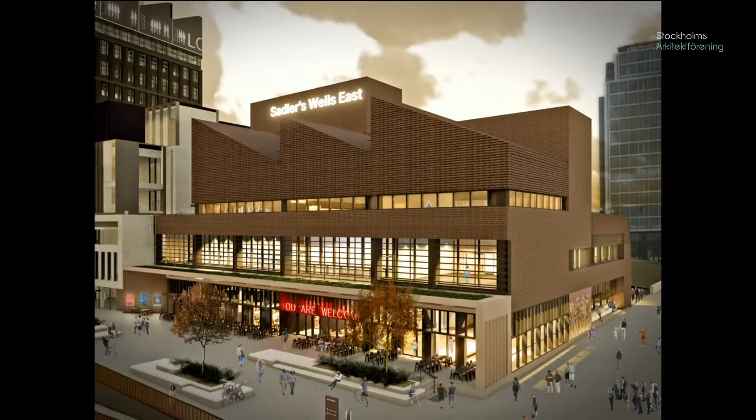During the course of this competition, the brief used to have a lot of archive and accessible storage areas. Now it's really just an exhibition building, so it's like a sort of container for some fixed and some changing exhibitions.

We were trying to think, how do you make something like a sort of precious casket? There are spaces between the exhibition and the entrance that need to be like a buffer zone, that either for reasons of environment or for reasons of movement give you this kind of in-between space.

We were in the National Gallery in Dublin looking at this beautiful Vermeer, and I said to John, isn't her sleeve amazing? It's like a sort of cubist painting or a modernist space. We suddenly thought, could that be the outer wall of a museum? Then her arm inside is the exhibition, and the gap between the arm and the sleeve is the kind of space of movement, what the Japanese call ma.

John had written in a book some years ago about this wonderful film, Notebook on Cities and Clothes, by Wim Wenders, about Yohji Yamamoto. There's a wonderful passage about how Wim Wenders puts on this jacket of Yamamoto's and suddenly feels he's more himself in the jacket than he ever was before. And there are beautiful scenes where, before the models go on the catwalk, Yamamoto is with the scissors, catching them on the way out, cutting and trimming and adjusting the clothes.

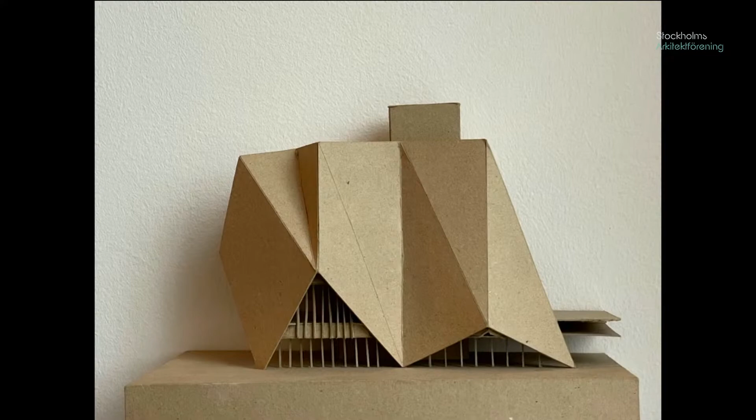So we had this idea, and we started making these models that wrap around the exhibition spaces in the middle, which are like the jacket, or the sleeve, or the ma, and give you room, for example, for big windows. They also give you room for stairs.

At the same time as we were coming up with this idea, there was a great exhibition of Balenciaga at the V&A, and there was this amazing photograph in the middle, an X-ray photograph of one of Balenciaga's dresses, where you could see the structure and then the outside form.

So we started drawing our sections as if they were kind of X-ray sections about the relationship between form and structure, and actually the surface, the engineer's drawing, because we had to have these huge piles going down into the ground. It was also part of articulating something that's canted and shaped, and then something that's more formed and formal inside.

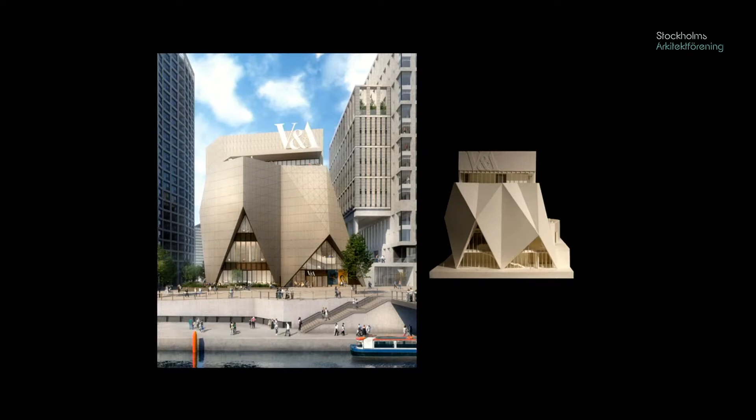But in fact, the building is clad in precast concrete, in big panels of precast with lines. We've drawn a lot of different kinds of lines and angles and incisions into this precast to make the building like a kind of drawing.

We're very interested in the fact that the V&A is a craft museum. It has a museum full of objects, full of beautiful things that are made and crafted. So the craft of how you make precast concrete became a real subject we got engaged in, because we felt the building should have this crafted feeling.

Just to simply explain it, at the lower level there's this lower square, and most of this floor is back of house, but at this level there's a cafe, an entrance and a stairs. The white is the public and the black is the delivery and all the back of house stuff.

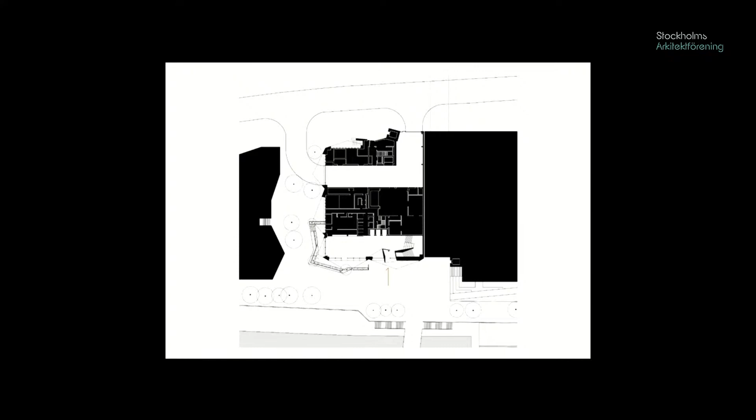At the level above, which is where the podium is, you can walk along the podium and in, which might be the main entrance, and the first exhibition space, which is here. Then there's shops and other public facilities, and you start to move on the staircase, but you also overlook the cafe and the space below.

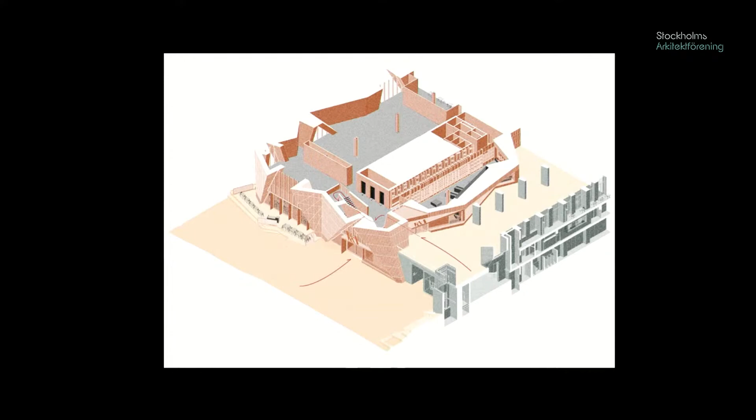The stairs and the movement wrap around the rectangle, so that this kind of crust of angled stuff gives you the shop, the stairs, the services. And then you can see how the stairs works its way up past the different exhibition spaces to the top.

On the upper level, this is a big exhibition space for changing exhibitions, which can be fitted out in different ways - it's just a big box of space really. The stairs then continues to wrap around the side here to give maximum space for exhibition.

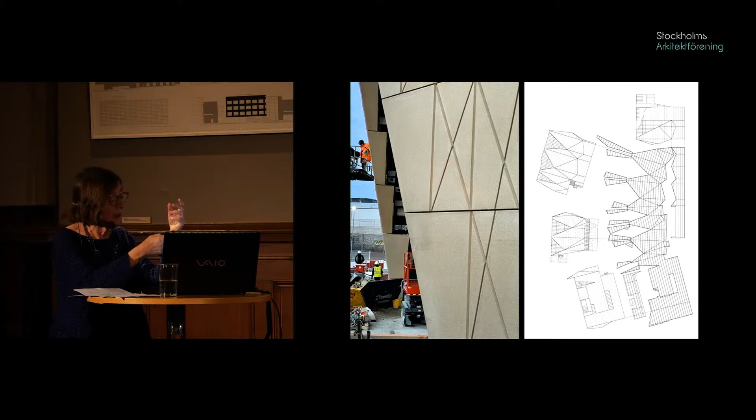And now the panels are going up. They're 2 meter high panels, so a panel goes, say, from there to there, and they vary in length up to about 12 meters long. And then they have these lines drawn at each angle.

The pattern changes - these angle lines are on this side, but they're only vertical lines on that side. So it gives a kind of... you read it, it'll intensify a sort of sense of shadow as you move around the building.

There are a very small number of windows, including the one that has a kind of eyebrow cut into the precast. Otherwise the windows are in these big V-shaped arches - this is a view from the square level of the high arch, which encompasses 3 levels, and then the one just inside the entrance here.